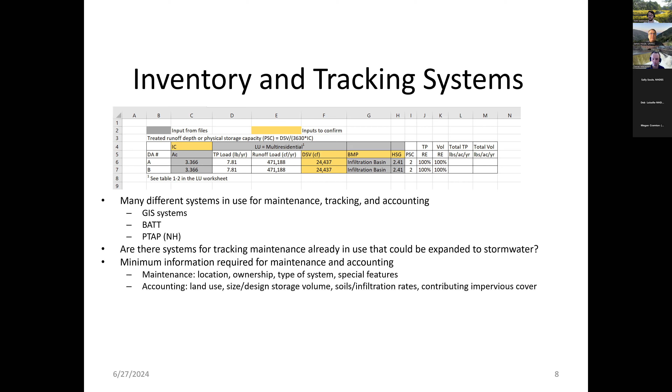The last thing is, again, on both the DES website and our website, we have this crosswalk that was generated because the MS4 permit in Appendix F has different names and terminologies for different systems. The New Hampshire manual, the Mass manual, all the state manuals have different terminology for everything. We tried to develop a crosswalk to help pigeonhole your treatment system into the appropriate BMP category to classify it as or model it as in PTAP.

And then, of course, if you still don't have a great answer, we see in the draft Mass RDA you're supposed to propose the most appropriate system that aligns best with the unit operations and unit processes of the structural control that you're implementing. So you find the best fit. All right. And with that, I'll stop sharing my screen and hand it over to Daniel.

Great. Thanks, Jamie. First, I have a new microphone. Can you hear me? I see a thumbs up. Great. So let me share my screen.

And we'll start with just the PowerPoint. So just a couple definitions. Actually, before, let me just show the PowerPoint, not confuse you too much yet. So a couple definitions for the performance curves and how you calculate things. The calculations are going to be handled after your entry automatically, so you don't have to worry too much about the actual calculation, but you have to know these to be able to put in the right information into your entry.

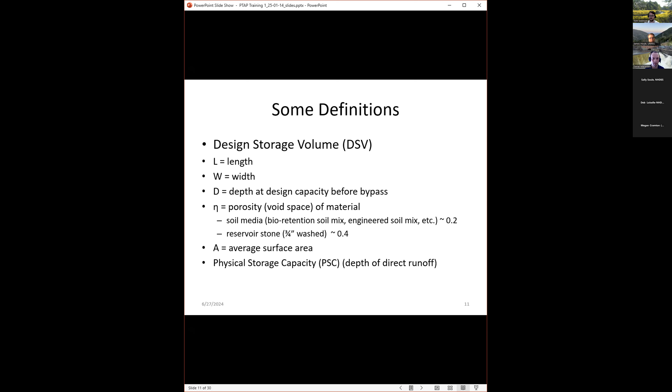So one quick DSV calculation here as an example. I'm going to go through it a little bit quickly, but you'll have it on the recording. You can always go back to it and pause it if you want to work through it. But this DSV equation comes right out of the permits in Appendix F. There's tables that give you all these equations for different SCMs. So for example, for an infiltration basin or surface infiltration, or a rain garden or bioretention with no underdrain. Again, Jamie just went through that crosswalk.

So ultimately, this is for the infiltration basin curve. So the DSV is the sum of all of the volumes in your cross section. So we have the ponding on top, and then the soil, and then the stone. So you're calculating the area times the depth for each layer. If you have a material that has a porosity, you have area times depth times the porosity of that material. So we have the ponding, and then soil, and then the stone.

And assuming the porosity of soil is about 0.2 and the stone is 0.4, I put in a couple of given dimensions here. So if you know your total footprint is 400 square feet, ponding depth of 1 foot, and then soil depth is 2 feet, and below that you have stone depth of 1.5 feet. And for the second part of the calculation, our impervious cover is 2 acres. So calculating the DSV, you just plug all these right into the area times depth times porosity, and we end up with a DSV of 800 cubic feet. So that means 800 cubic feet of water can be statically plopped into this bioretention.

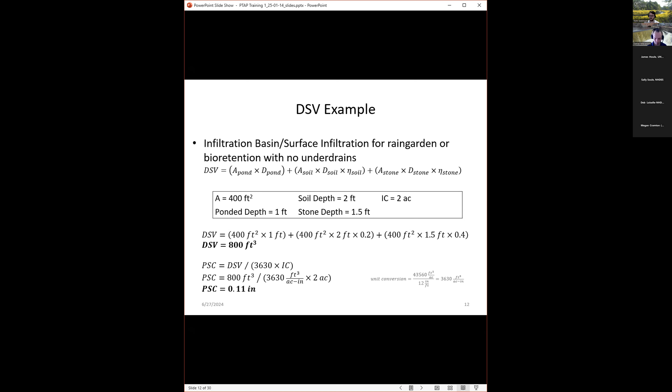We have a table in here for reference. Again, you can go back to this if you need to for infiltration capacity. This is pretty well known. It's a common table from Rawls, which relates different texture soils to the hydrologic soil groups, which are commonly used, as well as the infiltration rate. For PTAP, the only thing you need to know is the infiltration rate. So if you have field tests and you have directly measured infiltration rates, you can use that, or you can use this table to estimate it. For example, if it's in the design phase and you haven't actually tested yet.

One thing to know for PTAP, we have drop-down lists. So if you have an infiltration rate that is measured in between any of these, to be conservative, you would always go to the next lowest number. So for example, if we're right on this line and we have an infiltration rate of 0.4, you would go down to 0.27.

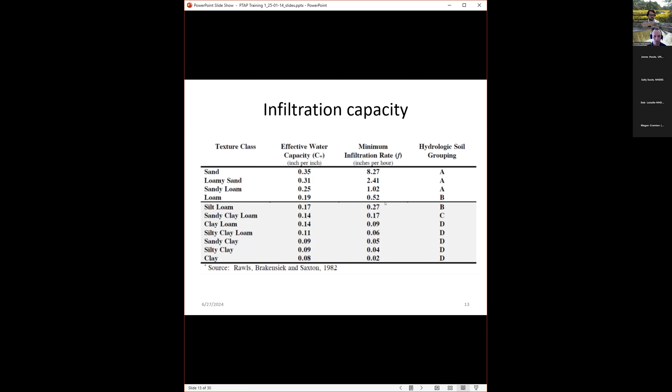So once you have the information, there's the question of how to report it. So first step is to put it into PTAP. So that's the database where we'll do the tracking and accounting. And from that, we can use a batch tool, which is the BATT tool. And that can take all those entries and calculate the credits for every single entry and put it into one neat report for you.

So here's the website for the actual BATT tool. But as I mentioned before, at the end of August or so, and I think Tom's going to talk more about the dates, we'll actually go through and create reports for every town that has entries in PTAP.

All right, so I'm going to go through an example to make this concrete and show you how it works. And you'll have this example to go back to if that's helpful. For this example, we're going to have a high school. This is a fictional high school. The reason we're doing a high school is to help practitioners have a real example to work with. And we're choosing the high school because most towns have a high school, and it's the largest impervious cover compared to other municipally owned properties.

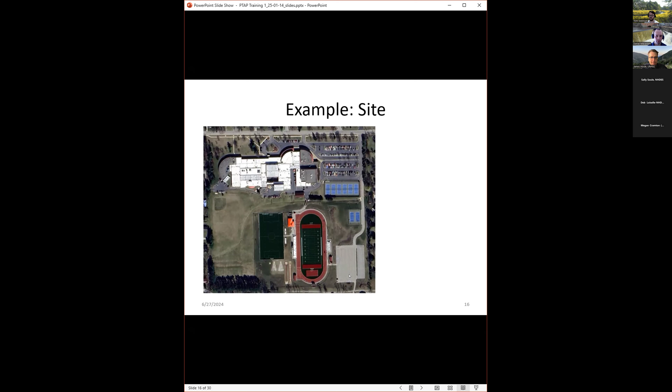So here's our site. It's just a satellite image. Hopefully everybody recognizes what things are. It's a pretty typical high school. So you have your big building. Here's a big flat roof right up front. Your big parking lot up front, a couple tennis courts, tracks, another parking lot. We're not going to manage all of it. We're going to go pretty quickly through this example.

As Jamie mentioned, we're only looking at impervious cover for PTAP, so you don't have to worry about the pervious cover and all the runoff for that. So if you delineate all the impervious cover here, our total is 18.99 acres. And for this example, we're only going to look at two. We're going to look at the rooftop and the front parking lot.

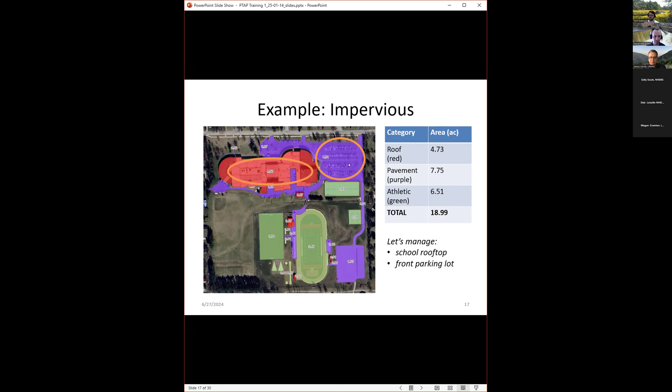So one system at a time, subsurface infiltration, that's just for the rooftop. So we're going to direct all the rooftop to some subsurface infiltration out in the field. Impervious acreage is 4.56 acres. Let's assume for this we have 0.27 inches per hour infiltration rate out in the soil. And I have a couple design details.

If you calculate your DSV, just like we did in the example before, area times depth times porosity, we're going to end up with a DSV of about 16,000 cubic feet. And your PSC, remember, that's the DSV divided by 3630 times the acres of impervious cover. Our PSC is 1 inch. In other words, we can store 1 inch of direct runoff in that infiltration SCM.

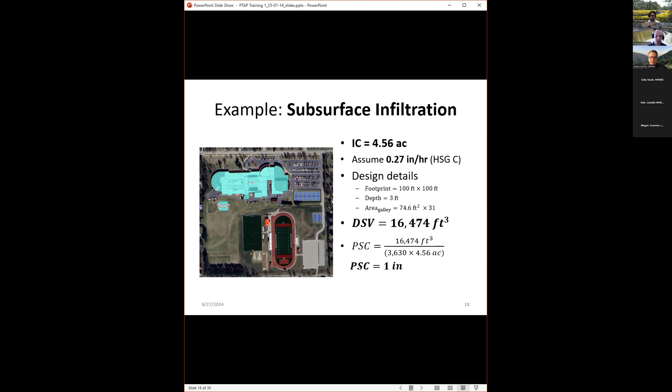So that's it. That's all the information you need to enter into PTAP for this SCM. And notice I have a couple texts bolded. Those are the pieces of information that you need for PTAP. So you need the impervious cover acreage. If it's an infiltration SCM, you need the infiltration rate. You need the DSV, and you need the PSC.

So Daniel, can you just go back to that slide? So we have the system type bolded there at the top, the impervious cover contributing, the hydrologic soil group, and you really just need the DSV, right? Because the PSC is going to be calculated based on the DSV and the contributing area. Right. So that's the minimum that you need.

But to actually put it into PTAP, you do need to enter the PSC as well. So it should be calculated. So it's not just a calculation. Okay, thank you. Yeah. At this point, you need both.

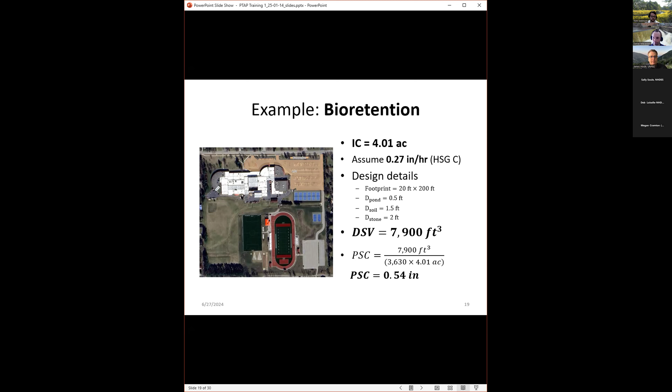All right, and I have some screenshots here in the PowerPoint. I'm also going to go through it live. So if you're following along at home and you want to practice on this, feel free. You can go through this with me now, and if it's too quick, you can always go back to the video. And with that, I need to stop sharing and share my screen.

All right, get out of the way, Zoom.